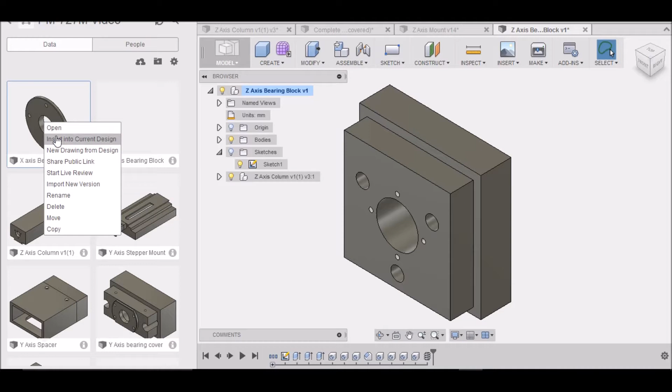Okay, so we've got the Z-axis bearing block drawn up, and actually the Z-axis is probably the easiest of the three because we get to utilize parts we've already made. So we're going to go up to the data panel, and I want to pull in my X, insert my X bearing cover. Okay, we can close our data panel.

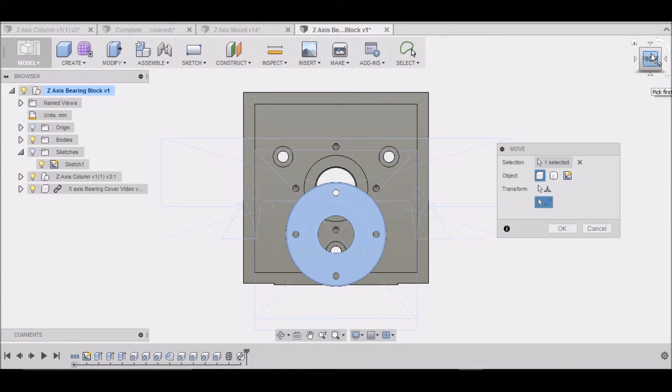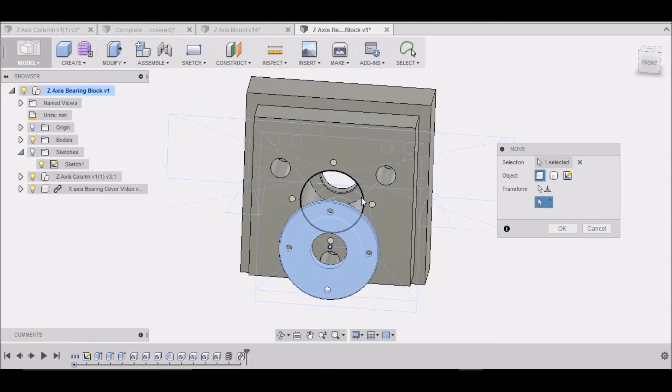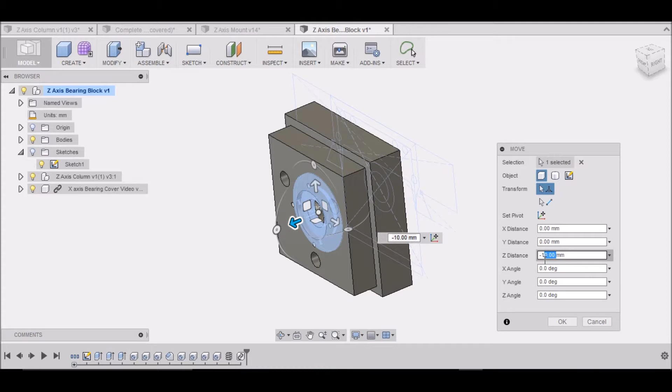Let's go over to the front here. Now there's really not an easy way that I've found to manipulate and move these around, but I do know you can go to point, and I can select this point here, and then this center point, like that, and that gets me pretty close. And then now I just need to move it in another 6.35 millimeters backwards, minus 6.35, and that, whoops, nope, that puts me flush, doesn't it? 3.35, there we go. Alright, let me move it back out 3 millimeters, and I think that'll be it.

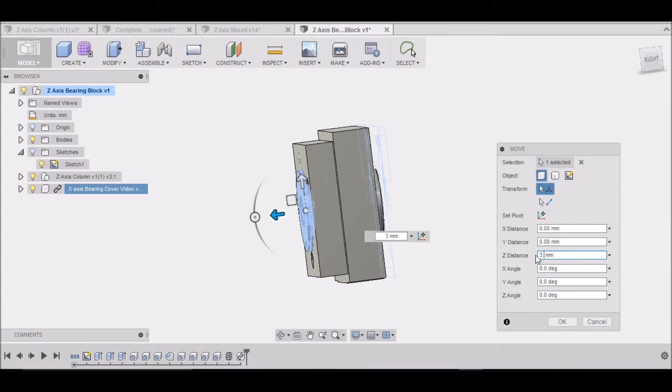Let me check before I close it out. 3.35, how about that? There we go. Click OK. Alright, and so now we have our bearing cover. You can see that it's lined up.

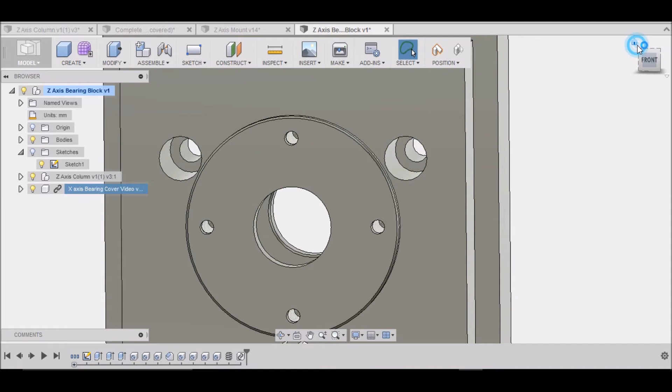So our X bearing cover works for our Z as well as our X, so we'll need to make 2 of those. And then also, let's open up our data panel, and we want to right click on our spacer here, and we want to insert it into the current design.

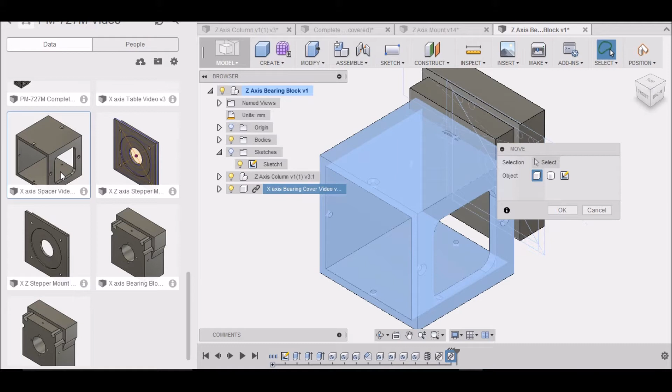Let's see if we can manipulate it, and we'll do point to point with it as well. So I can select this point and that point, and that should get me in the right spot. That looks good. We can select OK.

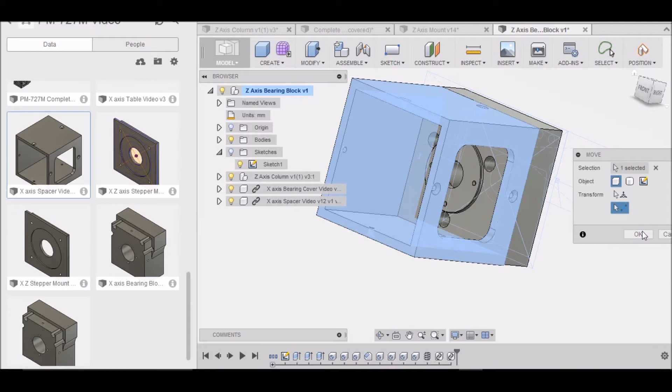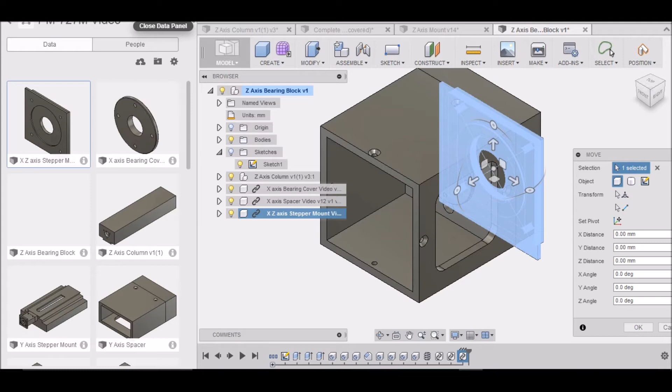Alright. And last but not least, our stepper mount for our X. We can insert it into our current design. We can close our data panel. And we want to go point to point.

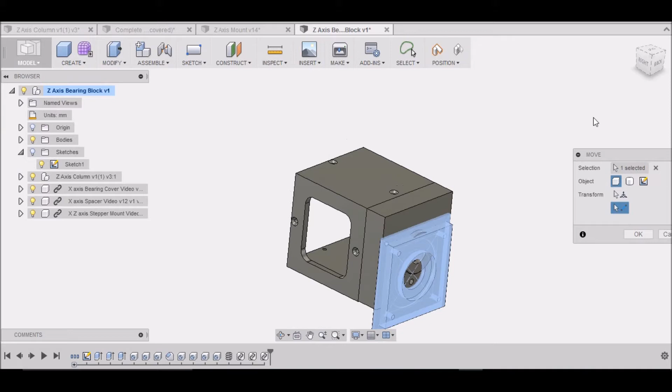We can select and get, there we go. Point, we can actually get this point right here. And this point right here. There we go. See how that looks?

Alright, select OK. Alright, so now that we have our spacer imported, our bearing cover imported, and our stepper mount imported, one last thing we need to do. We have the holes here for our stepper mount, but we need to put the holes in our bearing block

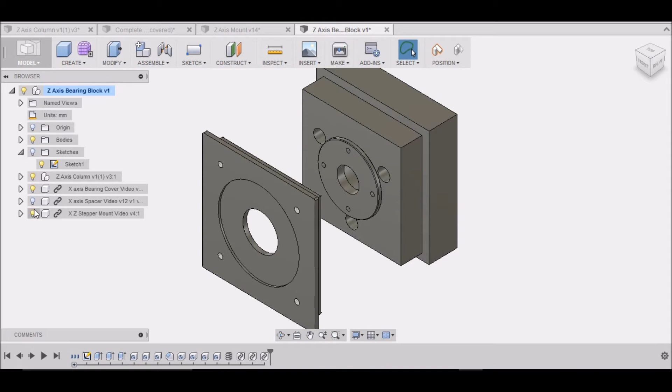to mount the spacer. Okay, so let's go to the right side. You can see we have the holes here, and they're already threaded, but we need these holes. So get this in position here. Alright, so let's turn our spacer off.

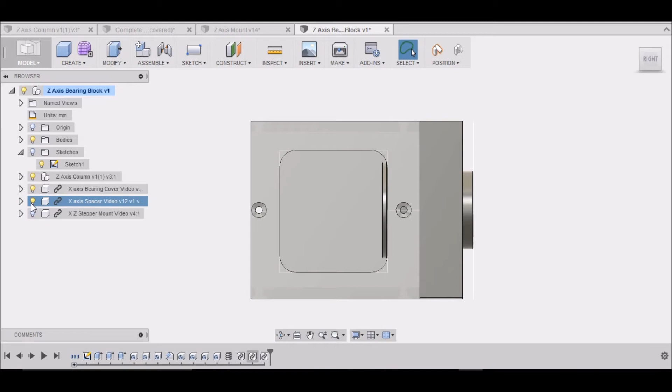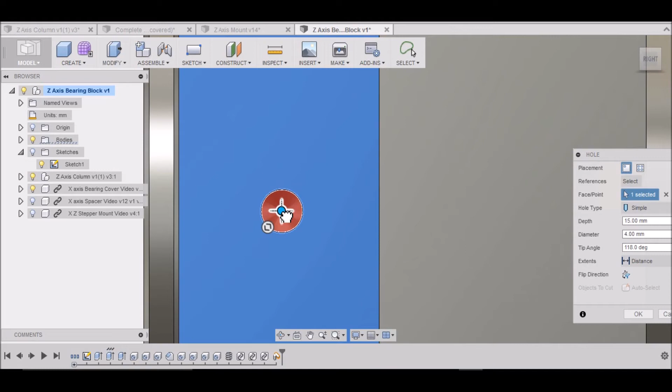There we go. We want to go up to create hole. I want to capture the position, and I want to click on this block right here. I just need a 4mm hole, 15, that looks good. Okay, I need to move it over. Right there on that dot will be good. Click OK.

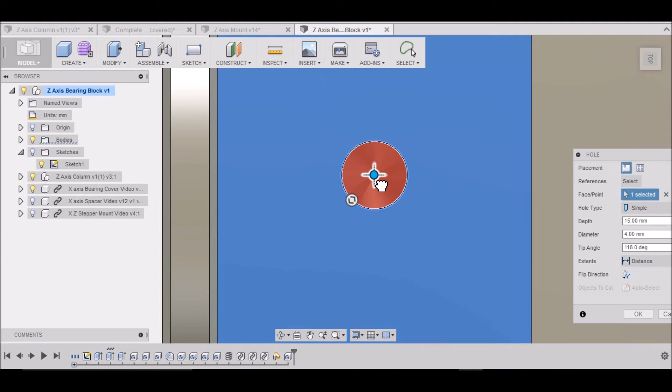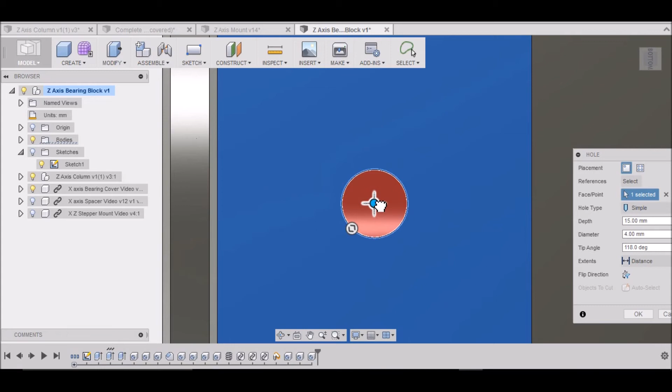Turn it. Right click, repeat hole. Okay. Right on top of that dot. Click OK. Right click, repeat hole. Alright. And one more. Repeat hole. And it kind of draws it right to the dot there. Click OK.

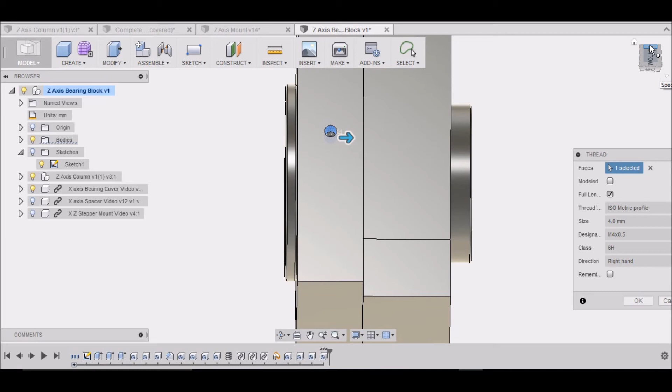Alright. And then last, just thread them. Hold Control. Select. Hold Control. And Control. Alright, select OK.

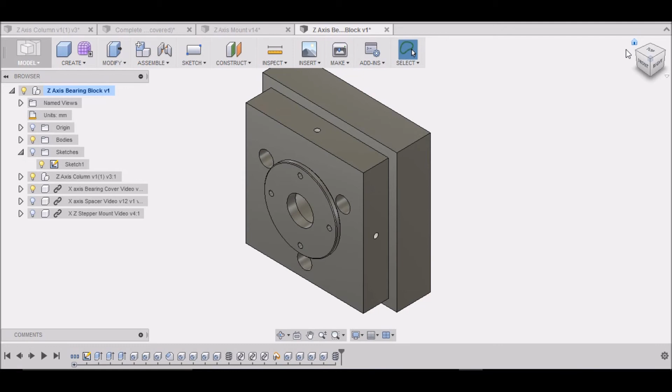There we have our holes for our stepper mount. You can double check it. Looks like it's lined up good. Okay. Looks good. Good. Alright.

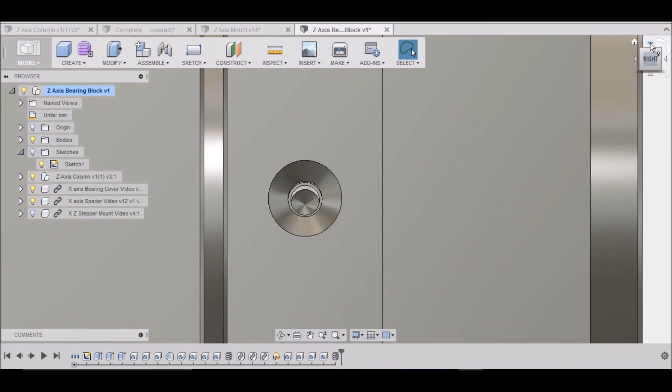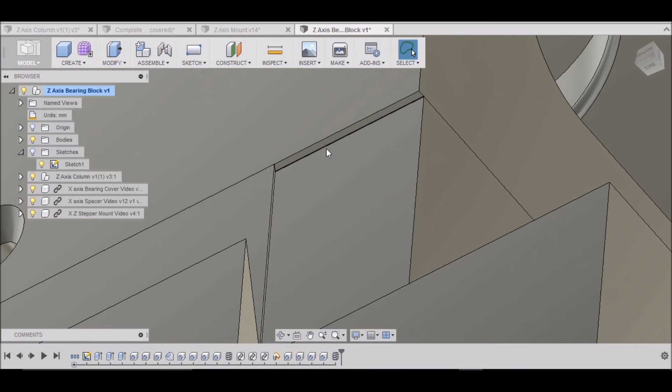There we go. That is our Z-axis stepper mount. You can kind of see how it goes on. Now, we can relieve this right here to get our extra space if we want. We can go up another inch or so, or go all the way up if we wanted to. I think I'm just going to leave it like this. That gives me an inch. I'm not sure that I'll need to go up that high.

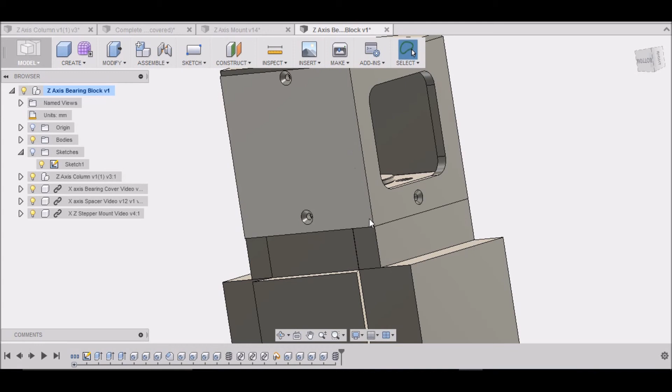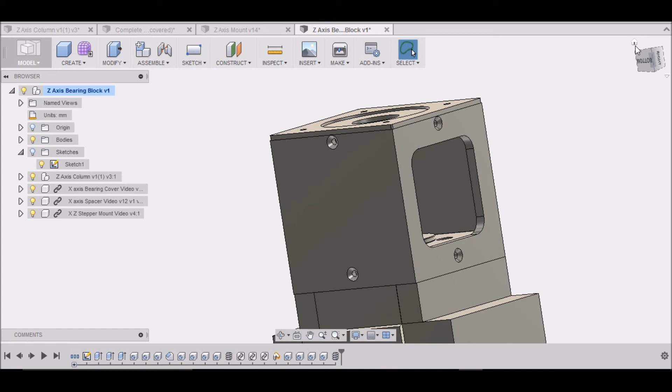By not notching this, it's going to take about 3/4 of an inch off of my Z height travel, but I'm not really sure how much travel I'm going to have until we get it all modified, so we'll hold off on that. This particular opening we can turn to the back if we would like to, or we can leave. I'm just probably going to leave it on one of the sides, but we can turn it to the back. So that is our Z-axis mount, and that pretty much takes care of all of our ball screw bearing and stepper motor mounts.

We will need to do our ball nut mounts, but we really can't get into that until after we get the whole mill disassembled, and I don't want to do that until I get these parts machined, because I'm going to be using the mill to machine these parts. So we'll get into that after we get these parts made up.

Alright, so stay tuned for the next video where we're going to start gathering our materials and machining some stepper mounts. If you have any questions or any tips for Fusion 360, please comment.